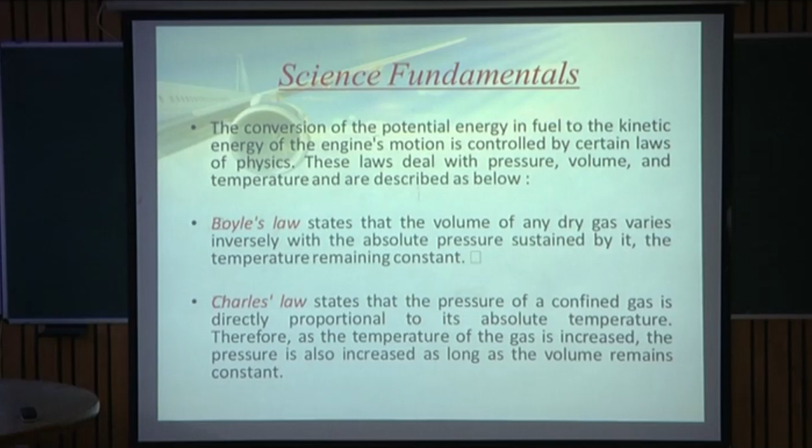So these are the basic laws, Boyle's law and Charles' law, which deal with pressure, volume and temperature. On the basis of these laws, we understand that the potential energy of the fuel is converted to kinetic energy of the engine motion.

The fundamentals of piston engine operation. Piston engines and gas turbine engines are both called internal combustion engines because the fuel is burned inside the engine. Since the fuel is burned inside the engine, it is called an internal combustion engine.

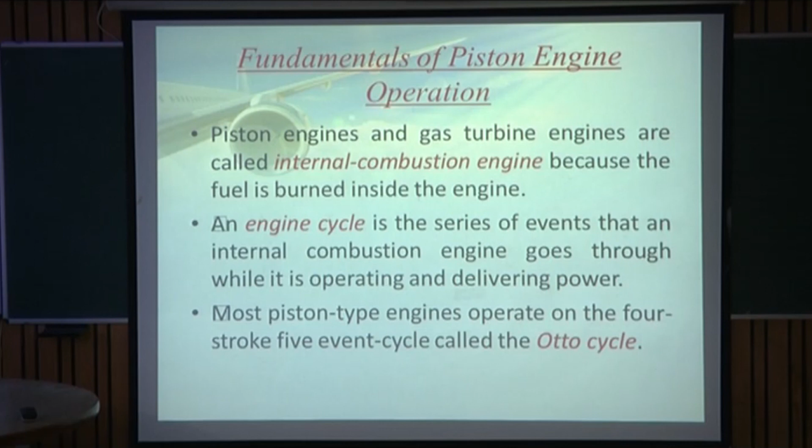An engine cycle is the series of events that an internal combustion engine goes through while it is operating and delivering power. This sequence of operations involves a series of events, and all these events together are called an engine cycle. Most piston type engines operate on the 4-stroke, 5-event cycle called the Otto cycle.

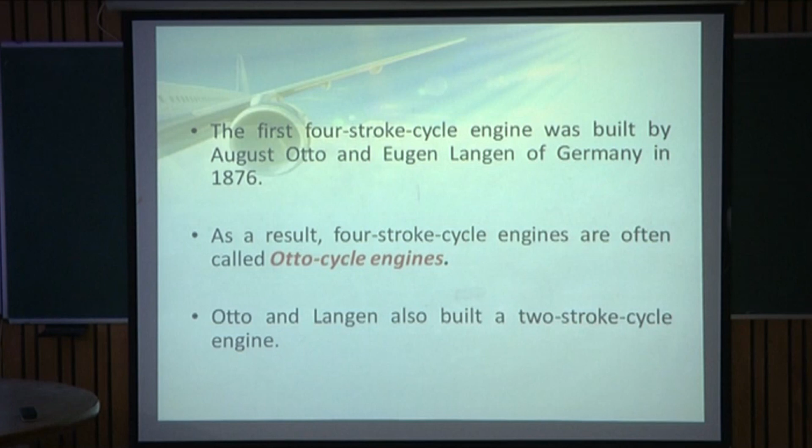This first 4-stroke cycle engine was built by August Otto and Langen of Germany in 1876. As a result, 4-stroke cycle engines are often called Otto cycle engines. These two scientists, Otto and Langen, also built a 2-stroke cycle engine.

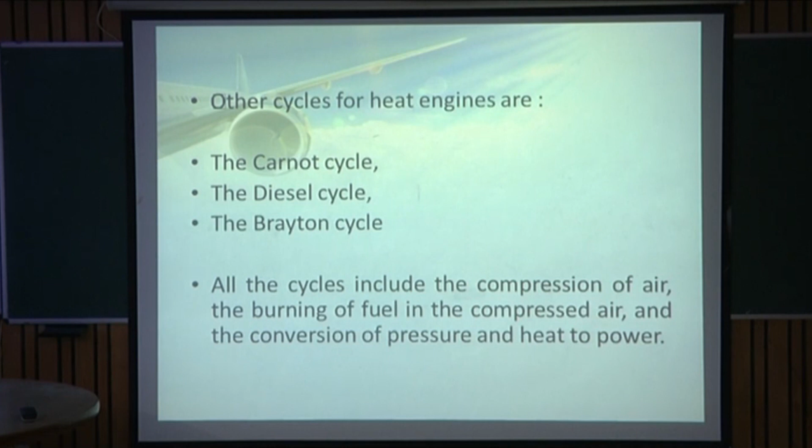Other cycles for heat engines we all know are the Carnot cycle, the Diesel cycle, the Brayton cycle, and all these cycles include the compression of air, burning of fuel in the compressed air, and the conversion of pressure and heat to power. So the basis of almost all engines is compression of air, burning of fuel in the compressed air, and conversion of pressure and heat to power.

As I have said earlier, we are giving more emphasis to piston engines at the moment. So the basic power developing parts in a piston engine are the cylinder, piston, connecting rod and crankshaft.

The piston is connected to the crankshaft by means of the connecting rod, so that the rotation of the crankshaft causes the piston to move with a reciprocating motion up and down in the cylinder. In the next chapter, in the construction of an engine, we will see all these parts: what a cylinder is, what a piston is, what a connecting rod is, what a crankshaft is, and how they are connected to each other.

The piston is connected to the crankshaft by means of a connecting rod, so that the crankshaft rotation is converted to the reciprocating motion of the piston in the cylinder.

The distance through which the piston travels in the cylinder is called the stroke. So the movement of the piston within the cylinder is called the stroke. And during each stroke, the crankshaft rotates 180 degrees.

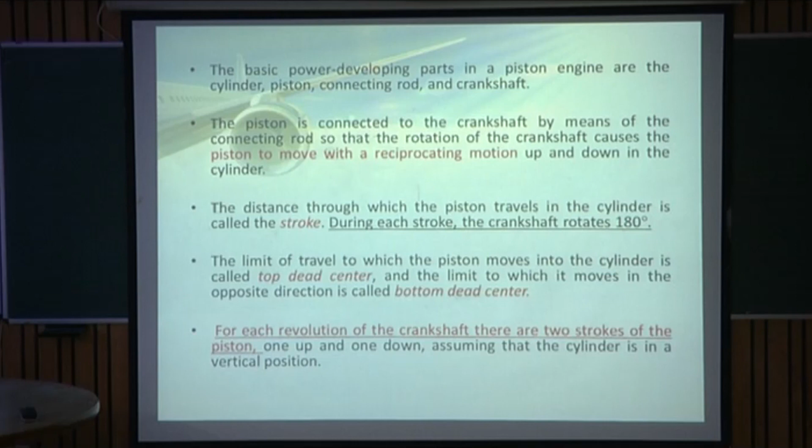The limit of travel to which the piston moves into the cylinder is called top dead center, and the limit to which it moves in the opposite direction is called bottom dead center. So in the cylinder, the bottommost position of the piston is called bottom dead center and the topmost position is called top dead center.

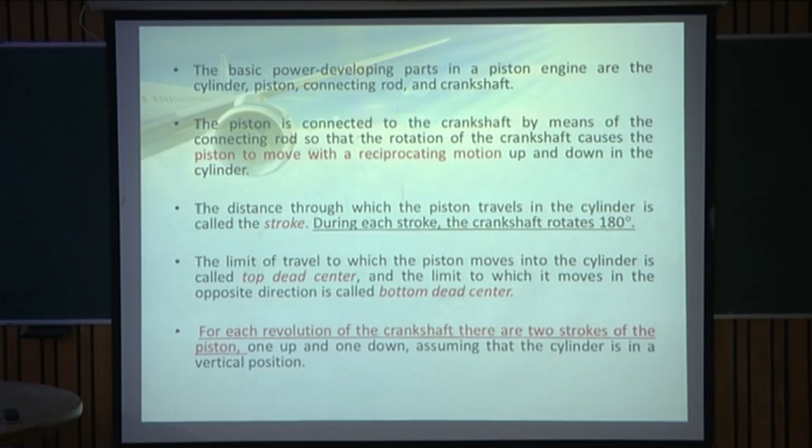For each revolution of the crankshaft, there are two strokes of the piston, one up and one down, assuming that the cylinder is in a vertical position. As we have seen earlier, during each stroke the crankshaft rotates 180 degrees.

So in one revolution of the crankshaft you have two strokes of the piston, one up and one down. That means 180 degrees plus 180 degrees is 360 degrees. So each revolution of the crankshaft will have two strokes, one up and one down.

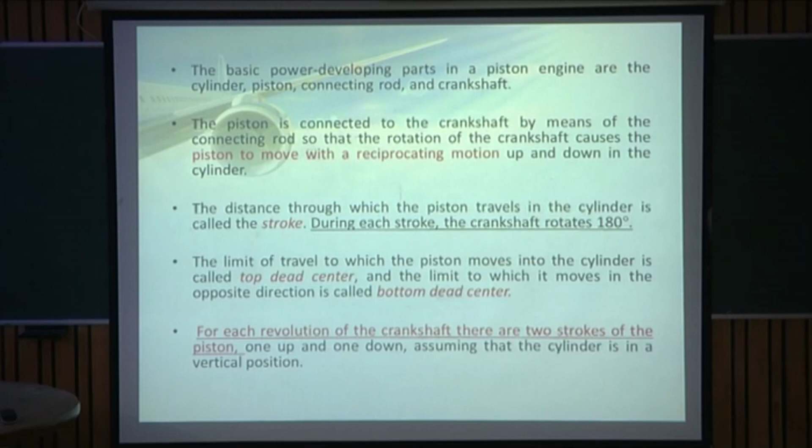Now coming to the Otto cycle, the 4-stroke 5-event cycle. The 4 strokes are intake, compression, power and exhaust. They are also called events: the intake event, the compression event. After the compression event you have the ignition event, then the power event and then the exhaust event. So 4 strokes: intake, compression, power and exhaust. And coming to the events: intake event, compression event, ignition event, power and exhaust events. So this is how it is a 4-stroke 5-event cycle.

In a 4-stroke cycle engine, the crankshaft makes 2 revolutions for each complete cycle. As we have seen earlier, each rotation of the crankshaft involves 2 strokes. So here you have 4 strokes, and 4 strokes will require 2 revolutions of the crankshaft. So the crankshaft makes 2 revolutions for each complete cycle.

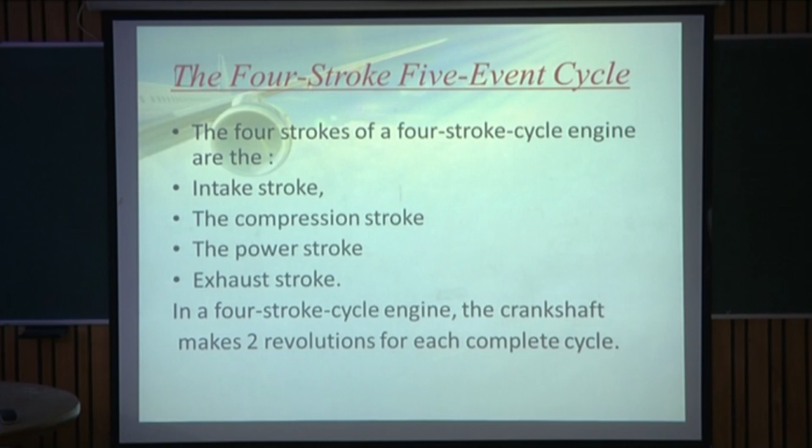Coming to the first stroke, the intake stroke. In the diagram, this is your intake valve, this is your exhaust valve. As mentioned earlier, this is your top dead center, the topmost position the piston can move to, and this is your bottom dead center, the bottommost position the piston can move to. This is your cylinder, and within it the piston, intake valve, exhaust valve, top dead center, bottom dead center. The distance between bottom dead center and top dead center to which the piston moves is called the stroke. This passage is the intake passage and this is the exhaust passage, with the corresponding intake and exhaust valves.

During the intake stroke, the piston is pulled downward from TDC in the cylinder with the intake valve open and the exhaust valve closed, by rotation of the crankshaft. So the piston moves from TDC, the top dead center position, to BDC, the bottom dead center position, with the intake valve open and exhaust valve closed.

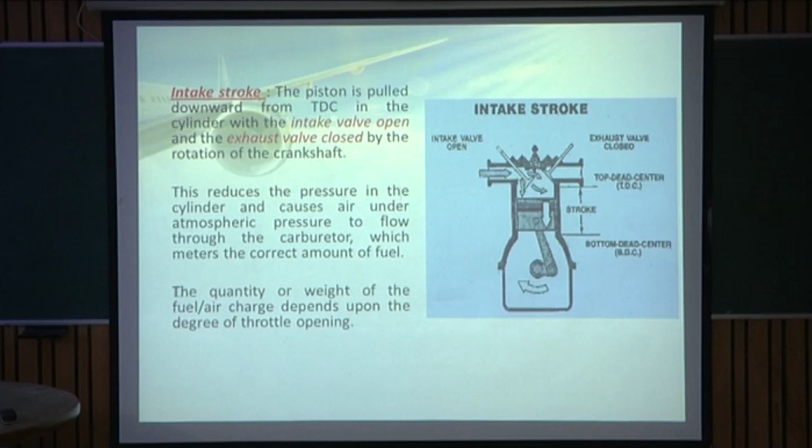The quantity or weight of the fuel-air charge depends upon the degree of throttle opening. So the quantity of fuel and air charge coming within the cylinder depends on the degree of throttle opening - we will study this in other chapters also. So this is your intake stroke.

Now when the piston has reached BDC - it started from TDC and has reached BDC - at the end of the intake stroke, the piston moves back towards the cylinder head. So after moving from TDC to BDC, the piston again moves back towards the top of the cylinder head, that is, towards the TDC.

The intake valve closes as much as 60 degrees of crankshaft rotation after BDC, in order to take advantage of the inertia of the incoming fuel-air mixture. Since the fuel-air mixture is coming through this intake passage due to the lower pressure in the cylinder, after the piston moves from top dead center to bottom dead center and back towards top dead center, the intake valve will close after 60 degrees of crankshaft rotation from the bottom dead center.

So when the piston has started from TDC position and reached BDC, it heads back toward TDC, and after around 60 degrees of crankshaft rotation, the intake valve closes. This late closing of the intake valve provides more charge in the cylinder, thus increasing volumetric efficiency, which we'll study in the coming slides.

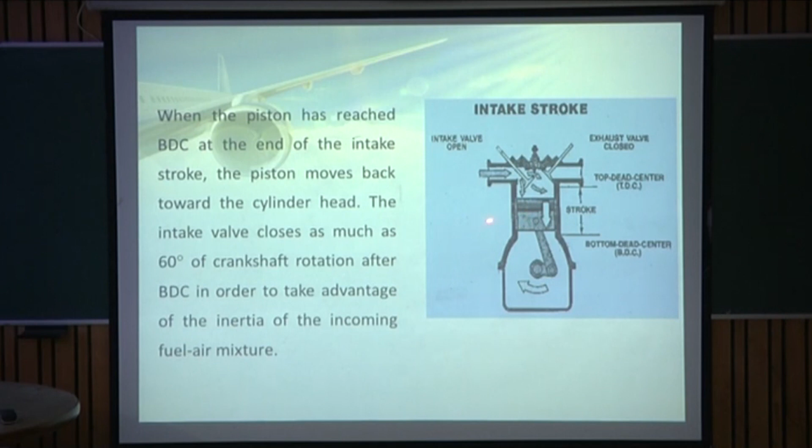We've seen that in the intake stroke, the piston moved from TDC to BDC with the intake valve open and the exhaust valve closed. The piston started moving back from BDC to TDC, and after around 60 degrees of crankshaft rotation, the intake valve closed, the exhaust valve also closed, and the piston moves up toward TDC, compressing the fuel air charge present in the cylinder. The purpose of compressing the fuel air charge is to obtain the characteristics required for burning and expansion.

Since the piston is compressing the fuel air charge, this is called the compression stroke. A few degrees of crankshaft travel before the piston reaches TDC, on the compression stroke, ignition takes place. This is the spark plug from where the ignition occurs. The ignition is timed to occur a few degrees before TDC to allow time for complete combustion of fuel.

So in the compression stroke, the piston moves from BDC to TDC. After the piston has moved from BDC, the intake valve closes, then the exhaust valve also closes, and the movement of the piston toward TDC compresses the fuel air charge - this is the compression stroke. Just a few degrees before the piston reaches TDC, the ignition takes place. This earlier timing of the ignition allows more time for complete combustion of fuel.

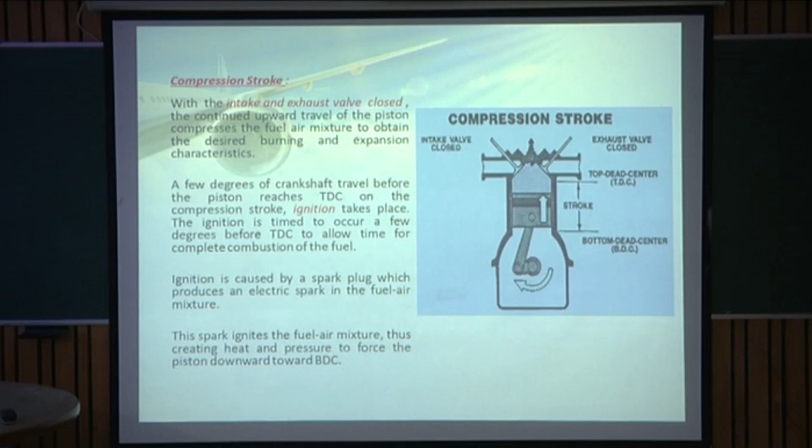So far we've seen that in the intake stroke, the intake valve was open and the exhaust valve was closed. Movement of the piston from TDC to BDC created low pressure in the cylinder, and the fuel air charge was brought inside. After the piston moved from BDC for about 60 degrees, the intake valve closed. With both valves closed and the piston moving from BDC to TDC, the compression stroke happened, and before the piston could reach TDC, a few degrees before that, the ignition event took place. Because of the ignition, the fuel air charge inside the cylinder was burnt, causing heat and pressure that forced the piston downward from TDC to BDC.

Coming to the next stroke, the power stroke. The piston is pushed downward by the rapid expansion of the burning gases as it moves through the top dead center position at the end of the compression stroke and starts down on the power stroke. Once ignition has taken place and the fuel air charge has burned, the heat and pressure makes the piston move downward from TDC to BDC. This is called the power stroke because this is when power is developed in the engine. Because of the burning fuel air mixture and the resulting heat and pressure, the piston is forced downward and power is developed. It's also called the expansion stroke because of the gas expansion taking place. The downward movement of the piston causes the crankshaft to rotate, thus turning the propeller. So this is the power stroke, the third stroke.

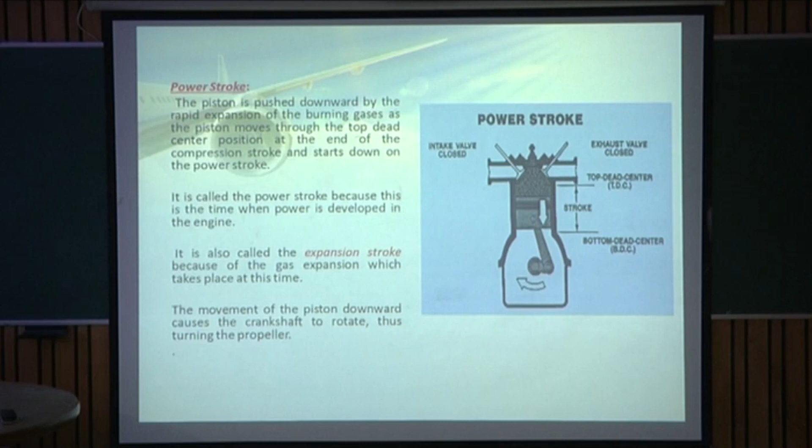Coming to the last stroke, the exhaust stroke. Here you can see the burned gases are exhausted out through the exhaust valve. The exhaust valve is open and the burned gases are exhausted outside through this passage - so this is called the exhaust stroke.

This is also called the scavenging stroke because the burned gases are scavenged or removed from the cylinder during this stroke. Prior to the piston reaching BDC on the power stroke, as we have seen earlier, the piston was moving from TDC to BDC. Prior to the piston reaching the BDC position on the power stroke, the exhaust valve opens and the hot gases begin to escape from the cylinder. The pressure differential across the piston drops to zero and the gases that remain in the cylinder are forced out through the open exhaust valve.

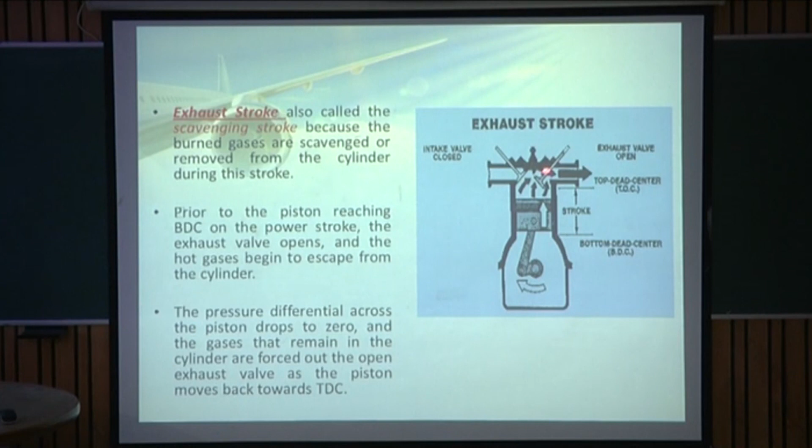As the piston moves back towards TDC during the exhaust stroke, the exhaust gases are scavenged out through this passage out of the cylinder. So we have seen in the exhaust stroke, the piston has moved from BDC to TDC, pushing the exhaust gases out. The speed of the exhaust gases leaving the cylinder creates a low pressure in the cylinder, as the gases rushing out of this passage create a low pressure.

This low or reduced pressure speeds the flow of the fresh fuel air charge into the cylinder as the intake valve is beginning to open. Because of this low pressure in the cylinder, the fresh fuel air charge comes through the intake valve.

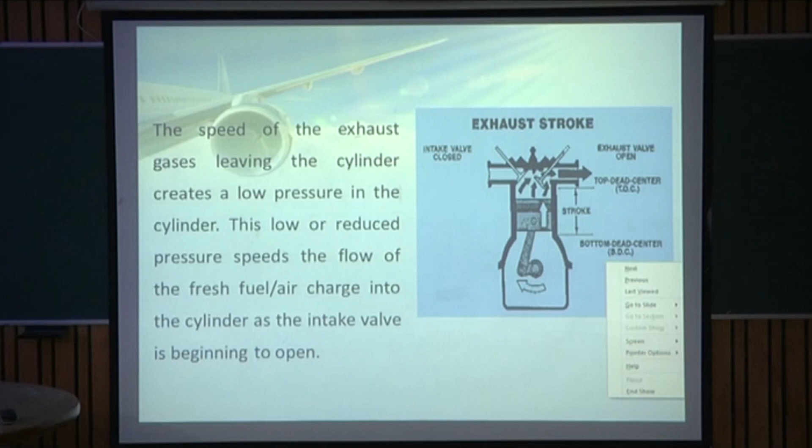The reason for early opening of the intake valve and late closing of the intake valve is to allow more fuel air mixture to enter inside the cylinder.

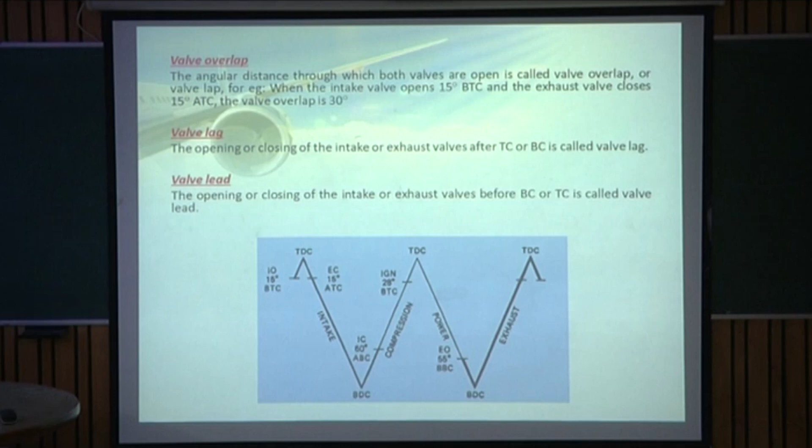Valve lag is the opening or closing of the intake or exhaust valves after top center or bottom center. So if the intake or exhaust valve is opening or closing after the top center or bottom center, it is called valve lag. Valve lead is the opening or closing of the intake or exhaust valve before bottom center or top center. So you have seen the three terms: valve overlap, valve lag and valve lead.

Now let's see the total crankshaft rotation when the valves are open or closed. For the intake valve open, the total rotational distance of crankshaft travel is 15 degrees before top center, plus 180 degrees for the complete stroke, plus 60 degrees after bottom dead center before the intake valve closes. So the intake valve is open for 15 plus 180 plus 60 degrees, which equals 255 degrees of crankshaft rotation.

Now for crankshaft travel with the exhaust valve open: it opens 55 degrees before bottom center on the power stroke, then 180 degrees for the complete exhaust stroke, and another 15 degrees on the intake stroke. So the exhaust valve is open for 55 degrees on the power stroke, 180 degrees on the exhaust stroke, and 15 degrees on the intake stroke, which equals 250 degrees.

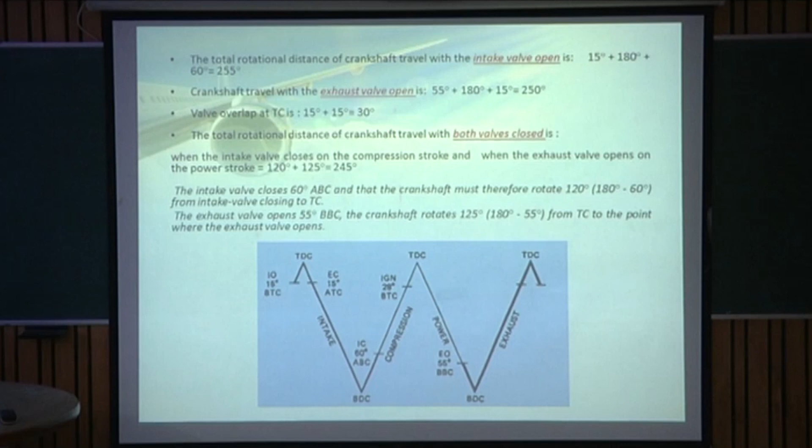Coming to the power calculations, aircraft engines are rated according to their ability to do work and produce power. Power is the rate of doing work. It depends on three factors: the force exerted, the distance the force moves, and the time required to do the work. The common unit of mechanical power is the horsepower. One horsepower equals 33,000 foot-pounds per minute, or 550 foot-pounds of work per second. In the metric system, the unit of power is watts, and 1 kilowatt is equal to 1.34 horsepower.

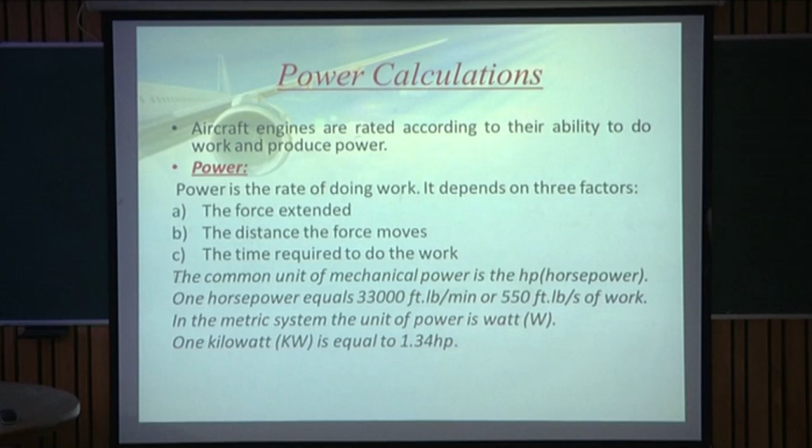This is just brief information to brush up. We all know what power is. The power of an engine can be calculated by understanding how many foot-pounds of work can be done by the engine in a given time. The following measurements are required for this purpose: cylinder bore, cylinder stroke, and piston displacement.

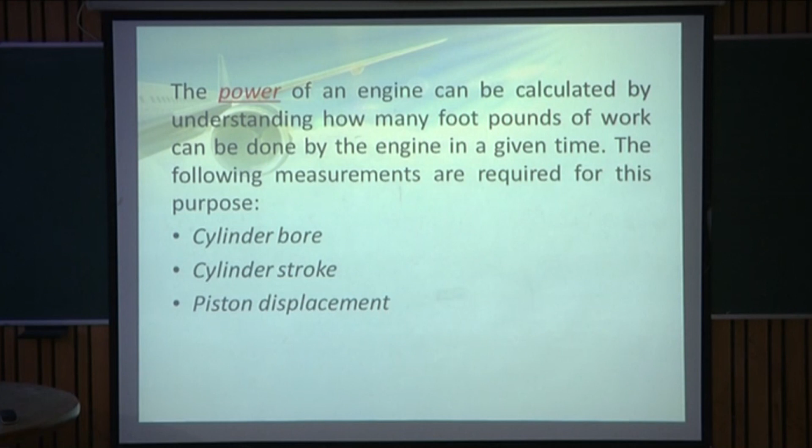We have seen in the earlier diagrams what is the stroke. We will also see what is the bore and what is piston displacement. Piston displacement is the volume displaced by the piston in moving from bottom dead center to top dead center, expressed in cubic inches. So the movement of the piston from BDC to TDC and the volume displaced during that movement is the piston displacement.

Piston displacement is equal to the area of cross section of the cylinder bore multiplied by the total distance the piston moves during one stroke in the cylinder. This gives the total piston displacement of one cylinder. The piston displacement of the complete engine is the total volume displaced by all the pistons during one revolution of the crankshaft, that is, the number of cylinders in the engine multiplied by the piston displacement of one piston.

If other factors are constant, the greater the total piston displacement, the greater will be the maximum horsepower that an engine can develop.

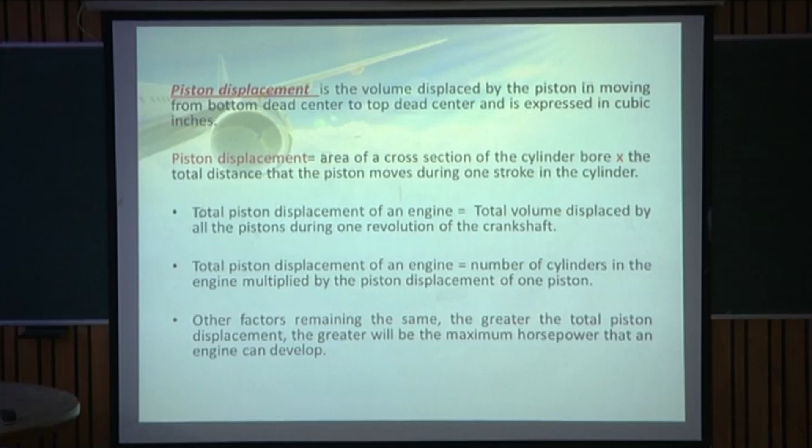Here you can see in this diagram the stroke and the bore. This is the top dead center position, this is the bottom dead center position, so the distance between the TDC and BDC is called the stroke. The piston moves from TDC to BDC and BDC to TDC. And this distance here is called your bore.

The distance through which the piston travels inside the cylinder is called a stroke. During each stroke, the crankshaft rotates 180 degrees, as we have seen earlier.

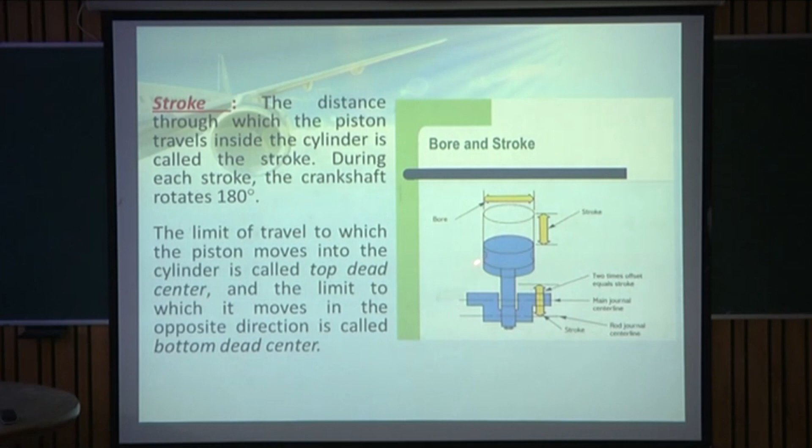The limit of travel to which the piston moves into the cylinder is called top dead center, and the limit to which it moves in the opposite direction is called bottom dead center. We have seen this also earlier: this is your top dead center position, and this is your bottom dead center position.

All internal combustion engines are required to compress the fuel air mixture in the cylinder so as to make it capable of doing more work from each power stroke.

What is compression ratio? It is the ratio of the volume of space in the cylinder when the piston is at BDC to the volume when the piston is at TDC.

The horsepower developed by an engine is dependent on the compression ratio of that engine, and the compression ratio is limited by manifold pressure and its effect on compression pressure. This is an important parameter which affects your compression ratio and in turn the power being developed by the engine.

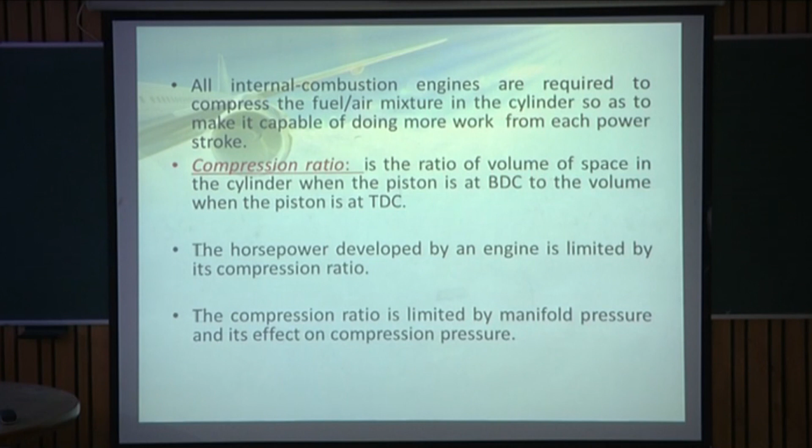What is manifold pressure? Manifold pressure is the average absolute pressure of the air or fuel air charge in the intake manifold and is measured in inches of mercury. Manifold pressure is dependent on engine speed, that is your throttle setting, and supercharging.

The manifold pressure depends on your throttle opening, the amount of throttle which you have opened, or the supercharging.

The use of superchargers increases the weight of charge entering the cylinder, resulting in greater power. If your engine is equipped with superchargers, their job is to increase the weight of the charge entering the cylinder, which results in greater power.

It causes the manifold pressure to be considerably higher than the pressure of the outside atmosphere. So the job of your supercharger is to increase the weight of the charge entering the cylinder, which causes the manifold pressure to increase as compared to the outside atmosphere.

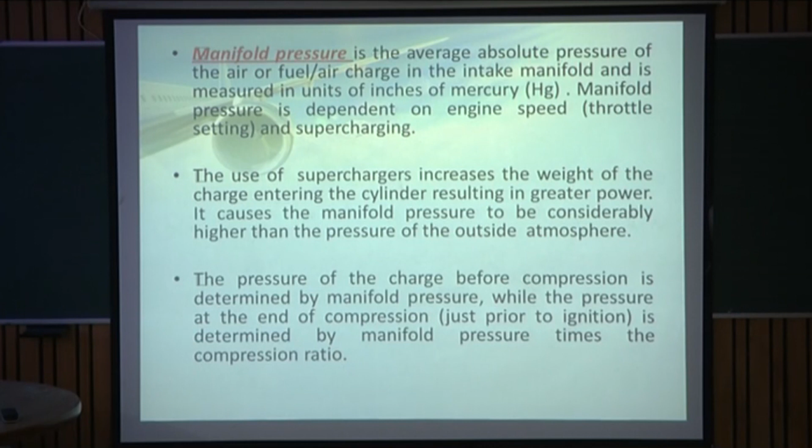The pressure of the charge before compression is determined by manifold pressure, while the pressure at the end of compression just prior to ignition is determined by manifold pressure times the compression ratio.

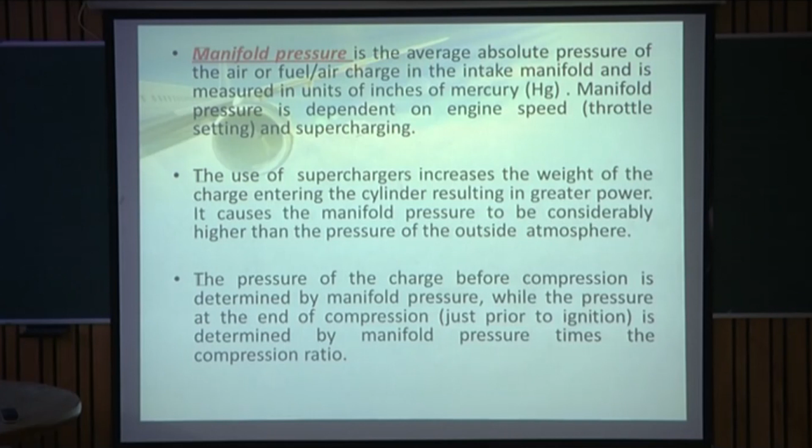In case your engine doesn't have a supercharger, the pressure of charge before compression is your manifold pressure. Whereas if your engine is equipped with a supercharger, the pressure just prior to ignition is your manifold pressure multiplied by the compression ratio of the engine.

Too high fuel air pressure just before ignition causes premature ignition or knock and produces overheating. We will read about this in future slides. Just understand that too high fuel air pressure is also not a very good thing.

Engines with high compression ratios convert more heat energy into useful work than engines of low compression ratio, resulting in less heat being absorbed by the cylinder walls. This provides cooler engine operation, thereby increasing thermal efficiency.

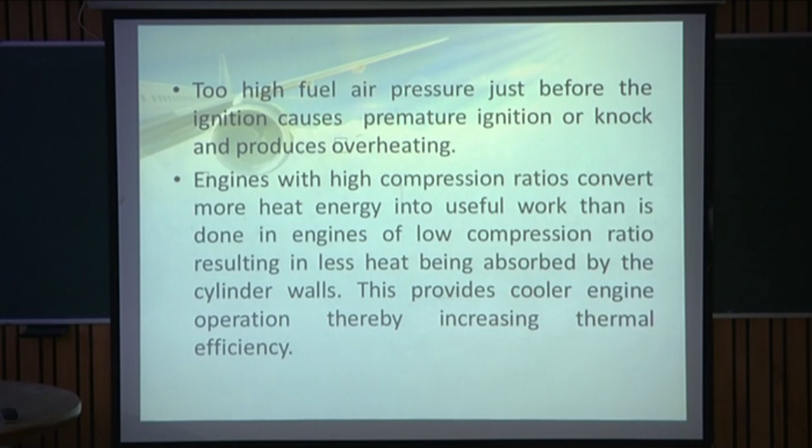Now coming to various powers, first is indicated horsepower, which is the horsepower developed by the engine - the total horsepower converted from heat energy to mechanical energy without reference to frictional losses within the engine. Thus it is the theoretical power of a frictionless engine.

Indicated horsepower is given by the formula PLAN K divided by 33,000, where P is the indicated mean effective pressure - we will see what that is in upcoming slides. L is the length of the stroke in feet. A is the area of the piston head or cross-sectional area of the cylinder in square inches. N is the number of power strokes per minute, that is RPM by 2. And K is the number of cylinders.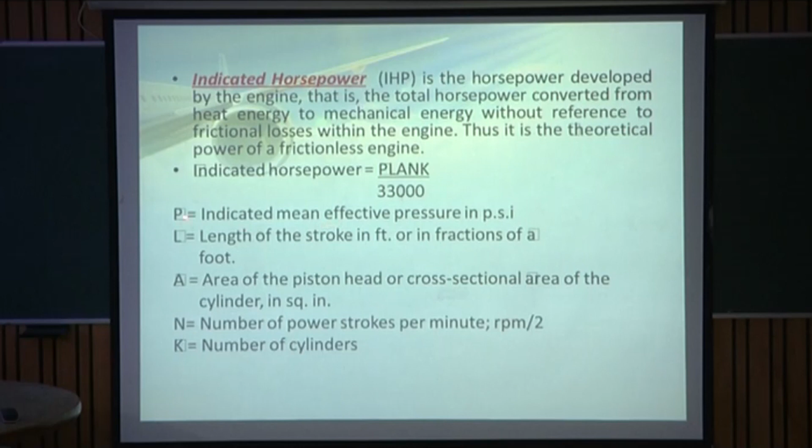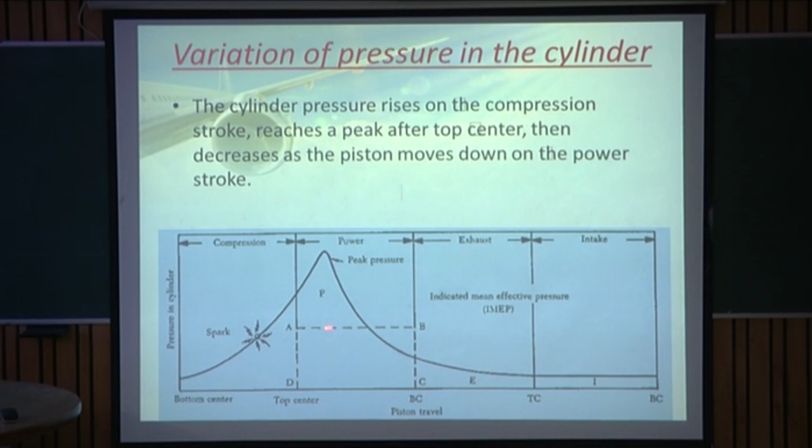In the diagram of indicated horsepower from our earlier slide, you can see the formula: PLANK divided by 33,000, where P is the indicated mean effective pressure in PSI. Here in the diagram, this line AB is your average pressure, known as the indicated mean effective pressure, also called IMEP.

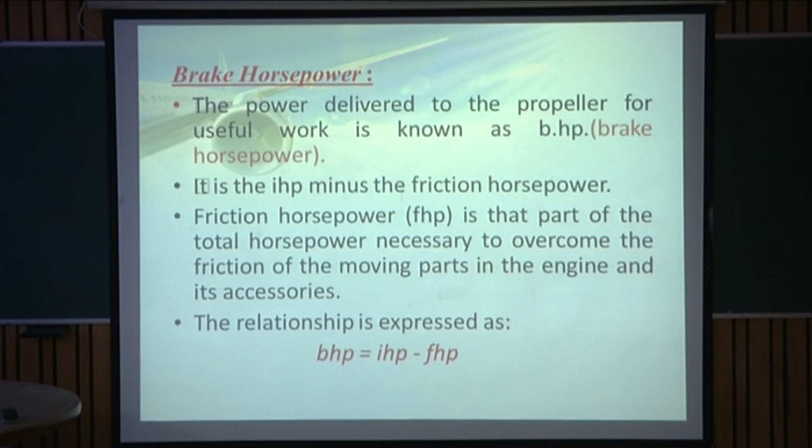Coming to another horsepower, brake horsepower: the power delivered to the propeller for useful work is known as brake horsepower, or BHP. It is the indicated horsepower minus the frictional horsepower. We had seen earlier that indicated horsepower does not consider frictional losses. Friction horsepower is that part of the total horsepower necessary to overcome the friction of the moving parts in the engine and its accessories. So the relation is BHP = IHP - FHP, indicated horsepower minus frictional horsepower.

Coming to thrust horsepower: the power resulting from a combination of engine and propeller working together is known as thrust horsepower. Thrust horsepower is equal to brake horsepower if the propeller is designed as 100% efficient.

But in practical conditions, the propeller cannot be designed as 100% efficient. The thrust horsepower and brake horsepower delivered to the propeller shaft can never be equal, as propeller efficiency depends on engine speed, attitude, altitude, temperature and air speed. Because propeller efficiency depends on so many factors, thrust horsepower can never equal brake horsepower.

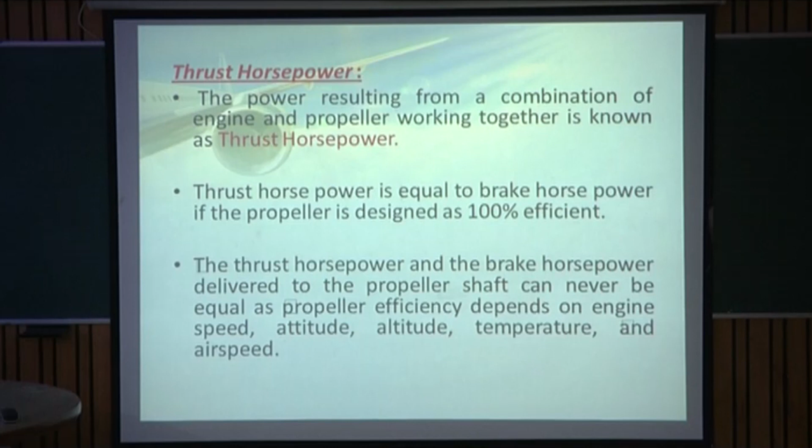So we have seen the different powers: indicated horsepower, brake horsepower, and thrust horsepower. Coming to power ratings, the engine has different power ratings. The takeoff power rating of an engine is determined by the maximum RPM and manifold pressure at which the airplane engine may be operated during the process of taking off.

Another power rating is rated power, also called standard engine rating. It is the maximum horsepower output which can be obtained from an engine when operated at specified RPM and manifold pressure conditions established as safe for continuous operation.

Coming to maximum power, it is the greatest power output that an engine can develop at any time under any condition. Rated power is the maximum horsepower output obtained from an engine when considered safe for continuous operation at specified RPM and manifold pressure. And takeoff power rating is the maximum RPM and manifold pressure at which the engine may be operated during the process of taking off.

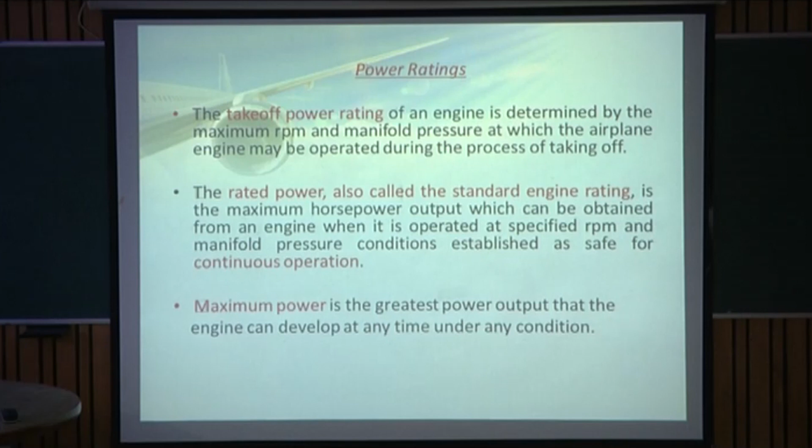So this was all about power ratings, the basic history behind the engine, some science fundamentals involved, the 4-stroke 5-event cycle, the different powers developed by the engine, and the different ratings of the engine. In the next chapter, we will see how an engine is constructed and what are the different parts of an engine.